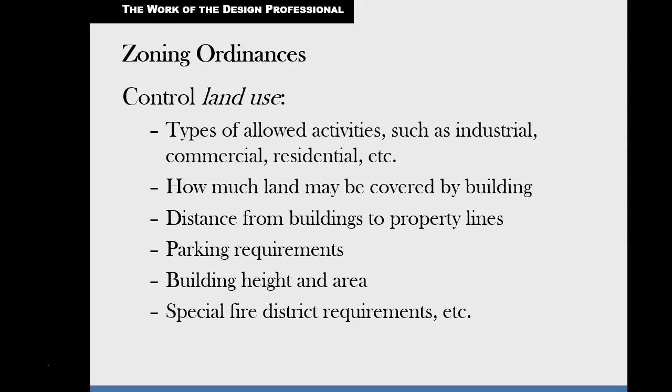Your building could be as big as Hertz, and they have a lot of employees, so parking requirements are big. Parking takes up a huge land area, and it's expensive to stack and make a parking tower. There's also indications of what the building height and area will be, because these may or may not fit within the zone. And also special fire district requirements. This could be published by the fire department, and that has a lot to do with, is it easy for them to access should there be a fire, and how do you mitigate that?

You must also now begin looking at building codes, and we found out last week that the primary goal is health and life safety. And in health and life safety, we have fire safety, emergency egress, construction quality, structural integrity, it has to hold up, durability, it has to last a long time or at least within its warranty, and livability, it must be pleasing to go into and to look at. Also, new things coming online are energy conservation, accessibility for physically handicapped, and sustainability. Here in Southwest Florida, with a heavy concern with climate change, we're going to be paying more attention to the last set of codes.

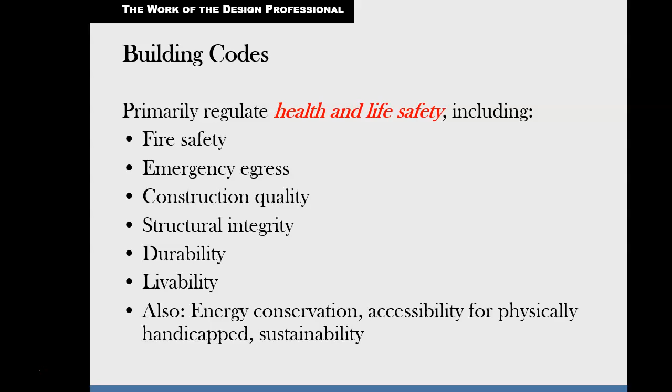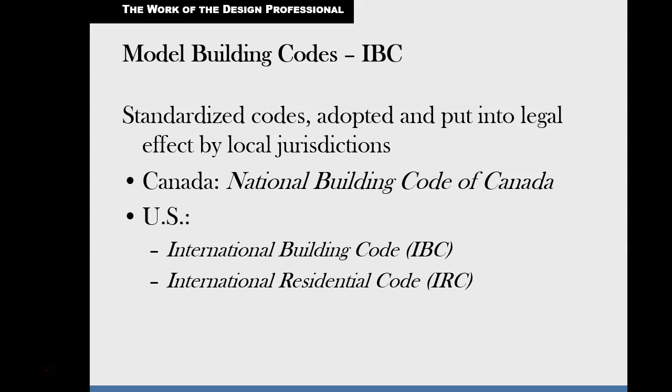The code books that we use for the most part are contained within the IBC, the International Building Code, a set of codes decided upon by world constituents. That covers construction. I, on the other hand, do more residential, so I consult the IRC, International Residential Code. They're both models that are used in the United States.

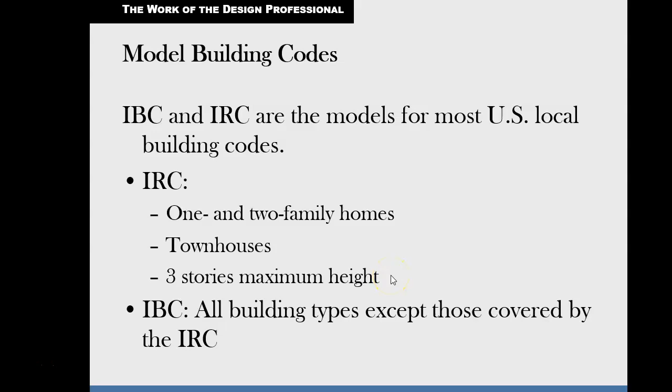Here's the breakdown. The IRC governs 1 and 2 family homes, townhouses, and 3 stories of maximum height. That's for the residential code. So if you go beyond this, or if you have another building type, you must use the IBC. These are all buildings except those covered by the IRC. This also kind of lets you know, when you drive around town, you see this. New construction of residential units usually tops out at 3 stories, and it's usually because of this.

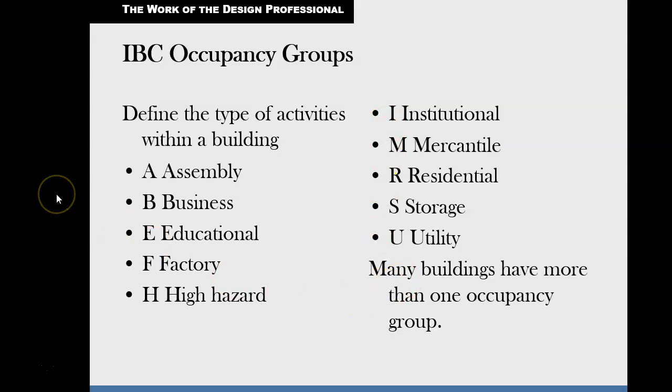You must also know who is going to occupy your building. Are you just going to store stuff, so you'd be in S storage, or are you going to be making a business, something that sells mercantiles, or are you going to create a factory that makes things? So you would decide which is your occupancy group. Here's an example of Group A, and it concerns their activities. Group A includes theaters, auditoriums, lecture halls, nightclubs, and other places of public gathering. So there are special requirements depending on the type that you choose.

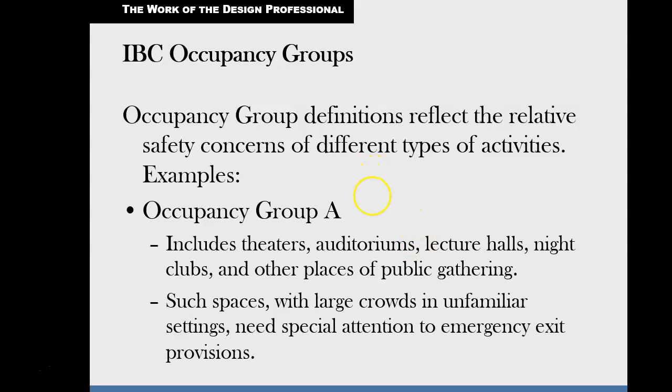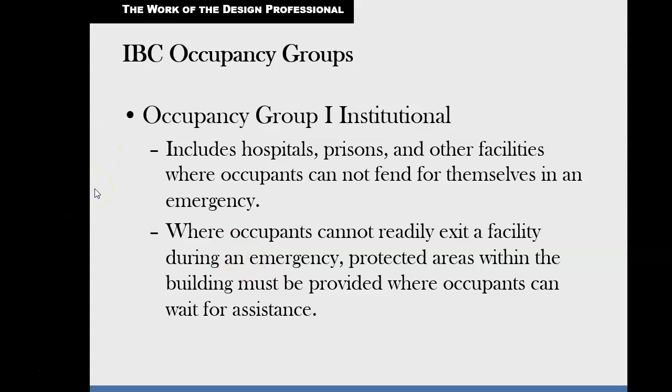Here's examples of institutional. Important here is hospitals. Occupants cannot readily exit a facility during an emergency. It could also be a jail. Protected areas within the building must be provided where occupants can wait for assistance. These are called areas of refuge.

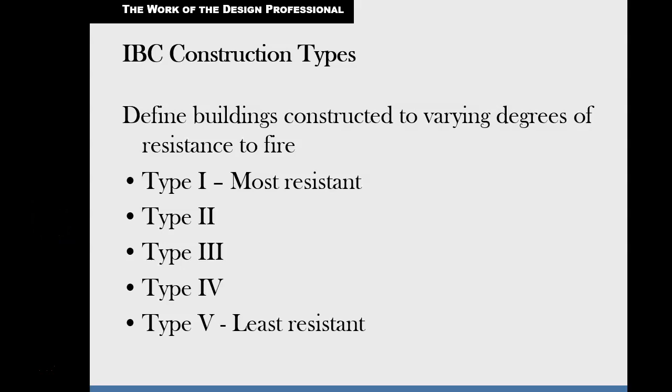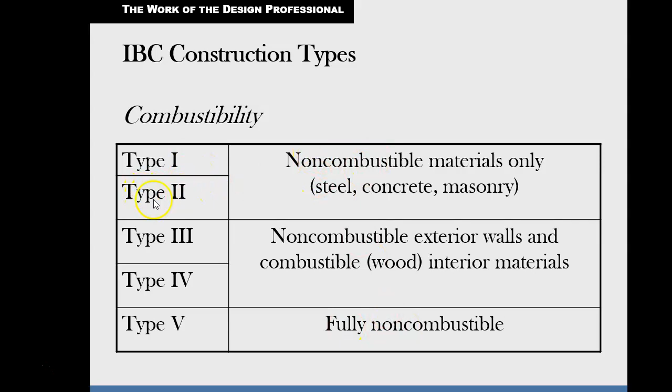Construction types define buildings constructed to varying degrees resistant to fire. So IBC also tells you what type of building you will make. Type 1 is most resistant to fire, and Type 5 is least resistant to fire. This all depends on how heavily used this building is. Construction types also tell you what kind of materials might start to go into your building. So if you do have that high one, you have non-combustible materials for Type 1 and 2. The majority of buildings are Type 1 and 2.

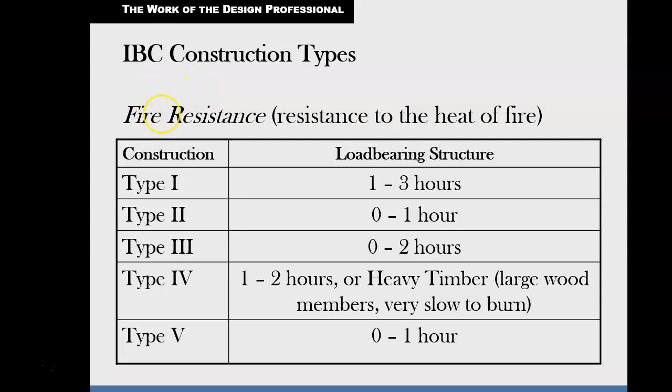And this is how they break down for the number of hours that something can burn, and this tells you how much time you have to get out of a building safely. There's also a dictation from IBC as to the allowable height and area of a building. Occupancies with greater hazard make smaller buildings. So if I have something that's making munitions, it's going to be small. If I have something that's larger, an open factory floor, that might allow me to go larger.